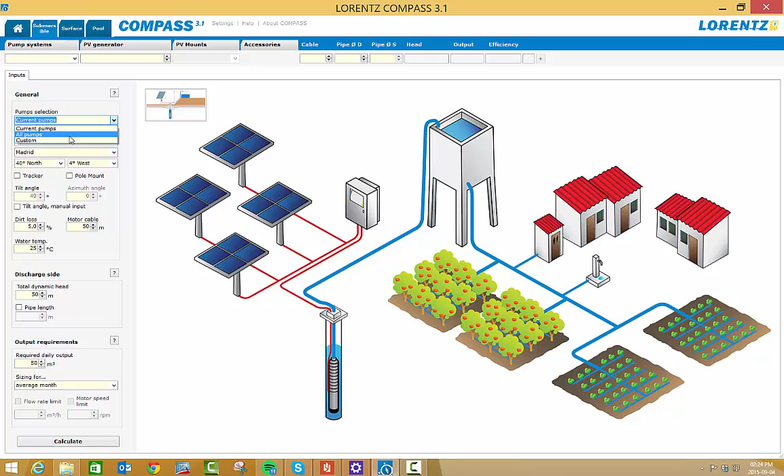Lorentz Compass. Submersible pumps, usually the more popular one to go for. Very basic software. You can use current pumps, all pumps, custom pumps. I use current pumps.

Click on location and start typing, then we'll reach it. Most of the regions in Southern Africa are listed, or if the customer gives you a location and you cannot find it, look for an alternative as close as possible via Google Maps, Google Earth, etc.

You're going to need basic parameters from the customer, like the depth of the hole, the volume of water that you want to displace, the depth of first water, if there's a drawdown. The drawdown is usually from the top of the borehole where your water level is once the pump starts pumping, and if it's not a very strong hole, the water level goes down. Now that is your drawdown level.

Now to the maximum drawdown level, you can pretty much sink the pump up to 5 meters below that. Most people prefer sinking the pump to 5 meters from the bottom of the hole, if that's allowed, if the water level is 5 meters above the bottom of the borehole. Suggested 5 meters from the bottom, not to suck up any mud or sand or residue.

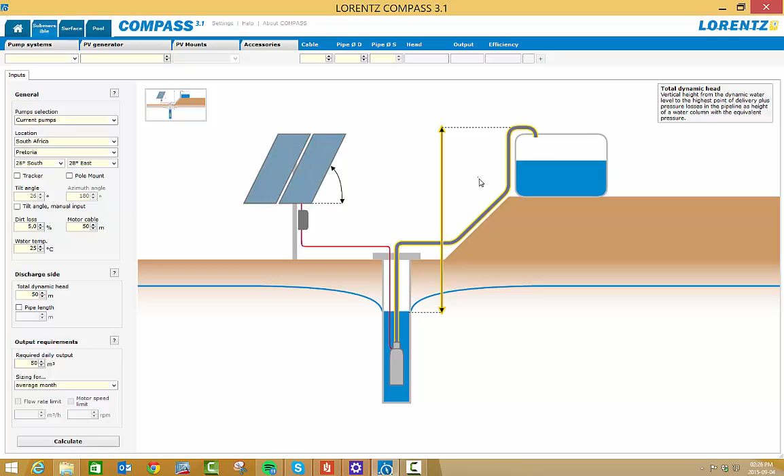Usually we start off with the total dynamic head. Total dynamic head will be from the mouth of the pump to where your water is going to be displaced. Now in this diagram it's a water pump. So let's say for instance the customer has a 45 meter head. I usually go 5 meters extra just for a slight bit of over engineering.

But his borehole is only 20 meters deep. The pump will be then situated at 15 meters, so you're going to allow for the 15 meters down the hole and approximately 5 meters outside the hole for your cable. You don't always spec your cable as the same depth or the same length as your dynamic head.

Pipe length, that's for in case you run long pipe distances and the tank is not situated next to the hole, then you can add a pipe length. Let's say for instance the tank is 120 meters away from the pump itself. That will be your 15 meters depth of the hole, the pipe running down there, and then obviously 105 meters across. Pipe type, you can select plastic or steel, all depending on what the customer already has in.

Now on the daily required output, certain customers will give you an hourly rate that they require, a certain amount of water per hour. Other customers will give you a daily rate required. Now for this selection, we're going to say the customer needs 2,000 liters per hour minimum. So the rule of thumb is, if it's 2,000 liters per hour times 10, you're going to say 20 cubes per day, and do your selection for the driest month as you want the minimum volume available in your driest month. Click on calculate.

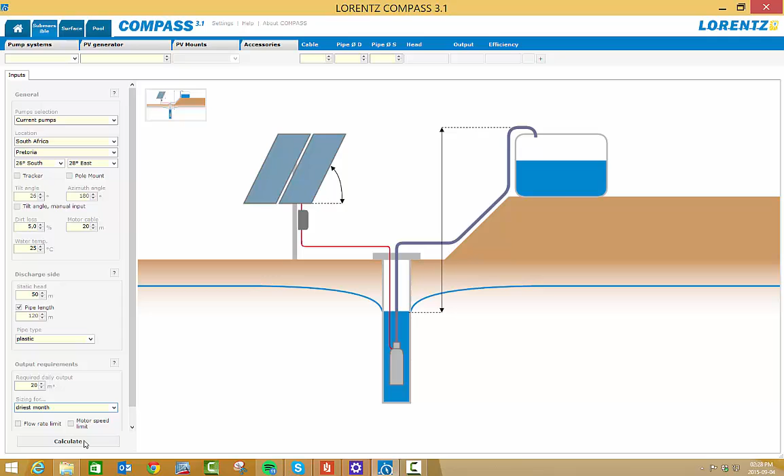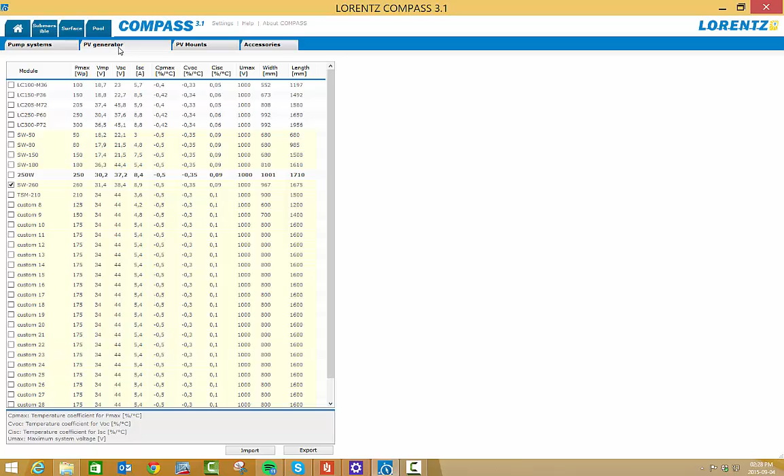Now it's going to give you a bunch of options. Not always necessary to go for the cheaper option. You can give the customer a larger pump for expansion at a later stage, which is always wise. If the hole can only allow a certain amount of water and the customer is convinced that he will never change it, then you can go for your cheapest solution. I prefer not using the smaller panels, as the selection is always a lot easier with the larger panels. Gives the best yield, gives the best performance.

Now, he said 2,000 liters per hour. This flow rate gives you an average of 1.9 cubes per hour, so you want to increase that. You can go and adjust the solar panels, the quantity. Okay, PS600, we are on the limit. Now, you can go to a larger pump. Right, there we go. That's a better solution right there. It's already 2.2 cubes, 2.3 cubes, so you can have it at an average of about 2,200 liters over 7 hours. I'm pretty sure the customer will be very happy with that.

In case the pump is giving too much volume, or 100 or 200 liters an hour too much, you can always open the control box and you've got a volume adjuster in the control box which pretty much controls the frequency of the motor. If you turn it down, it will give you less water per hour, less pressure, etc. So you can easily give the customer that scenario.

In the event that you might want to use a pump like this, and you see, okay, 4 square cable, you can adjust the cable lower to suit the customer's existing pump needs. If he's got a 2.5 square cable, he can use the 2.5 square cable. You can also adjust your pipe size.

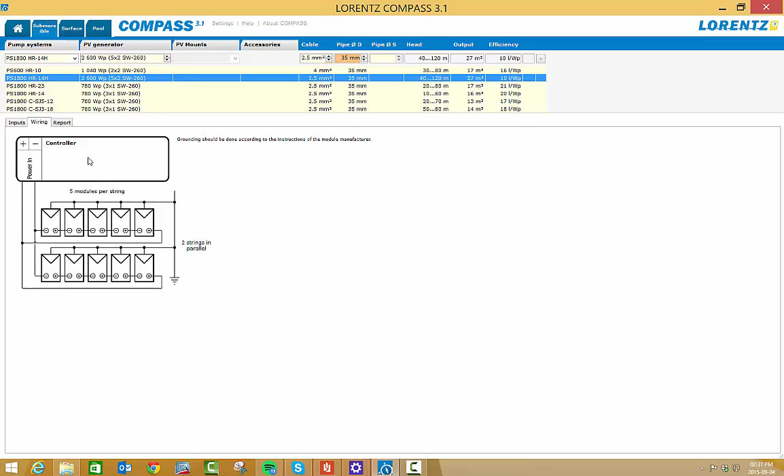Then you can go click on report. We'll give you all the basic needs for the setup. Motor cable 2.5 square, 20 meters of pipeline, 120 meter, 35 mm inner diameter, 1 probe set, surge protector, etc. And there we go. That's your basic pump selection.

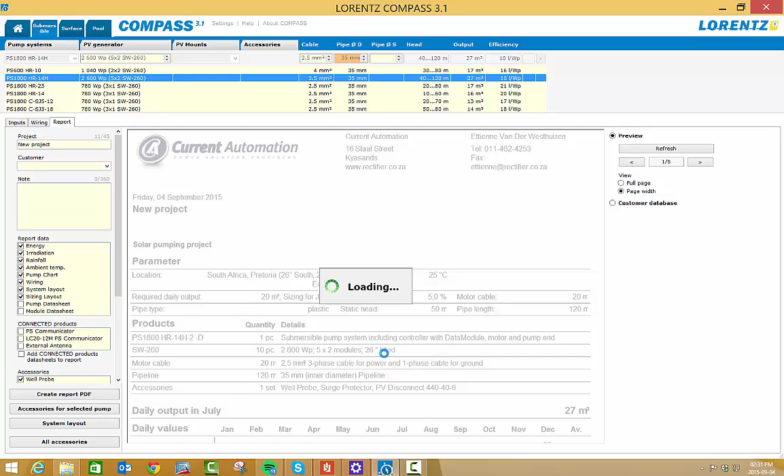It gives you all the curves that you can see. It gives a very wide explanation of the pump along with your wiring diagram and the basic layout of what the system can do. You can click on create report PDF and save it as the PDF and send it to the customer.

Myself, just for doing it quicker and more efficient, this whole page gives you all the data that you need. So you can click on your screen cut, do a screen snippet of that, save it as a JPEG and send that to the customer. More than this, they do not really need. If they need a report, you can print out a report, but it takes somewhat longer to generate the report rather than just taking a screenshot. Okay, and that concludes basic pump selection on submersible pumps.

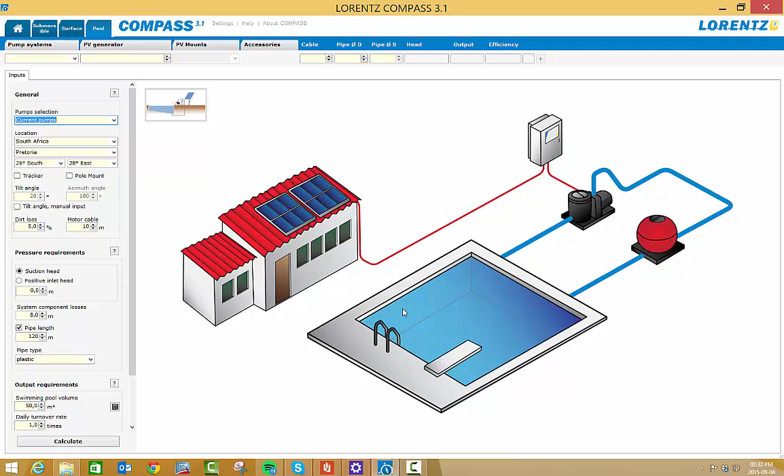Now, pool pumps. Same story, only thing is here we work with the total volume of the pool and the pool pump. Motor cable from your controller to your pump, usually not suggested that it's so far, not supposed to be more than 5 meters from my point of view.

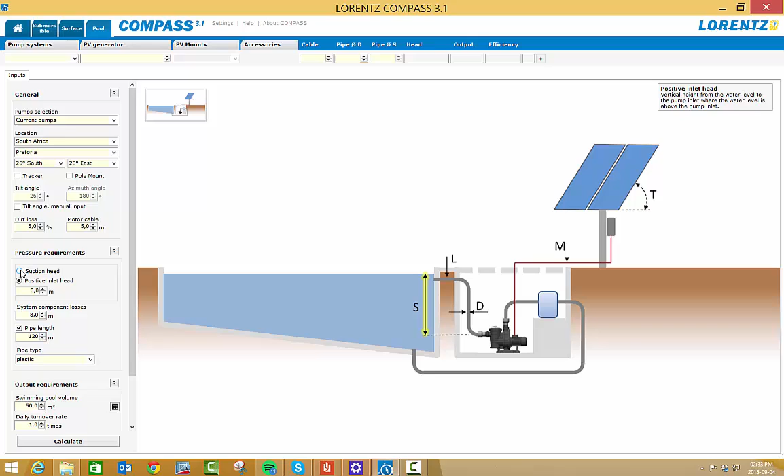Then, do you have a suction head or a positive inlet? Suction head is if your pool pump is higher than the pool. Positive inlet is if it's level or lower than the pool suction weir. So in this case we're going to use a suction head of, let's call it maybe 1 meter. System component losses. As a standard, we've got a 4 meter loss for a sand filter.

If for any reason your pipe runs higher, it's a long pipe run, long distance, and your pipe runs higher than the pump or needs to displace through a solar heating system, etc., you add the physical meters to that as well. Your whole pipe length, that is from the mouth of your pool into the weir, your suction line to the pump and your displacement line through the filter back to the pool. That's your total pipe length.

On a 50,000 litre, it'll never be 120 meters. You're looking in the region of about, let's call it 20, let's even make it 30 meters. Okay, pipe plastic, most pool installations are done with plastic pipes. Then your swimming pool volume. You can either take the customer's word for what his pool size is, or you can click on the calculator.

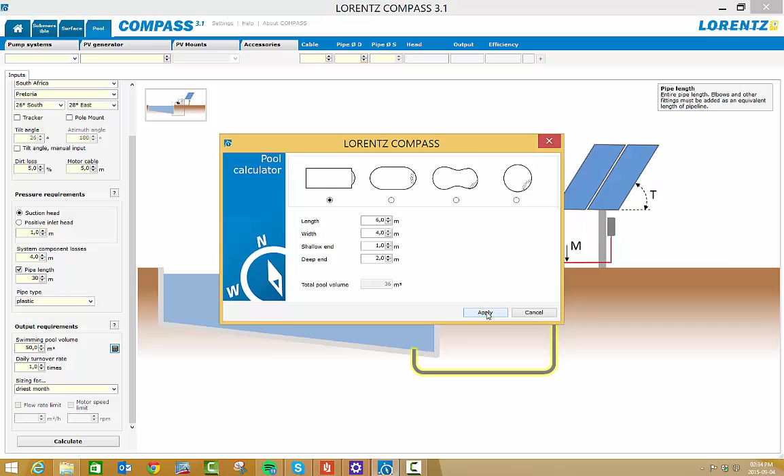Different shapes of pools. Normal square pool, let's say for instance the pool is 6 meters long by 4 meters wide. Your shallow end will be 1 meter and your deep end will be 2 meters. You're looking at a 36,000 litre pool. Apply. 36,000 litres comes in there.

As a standard, I suggest a daily turnover rate of 1.5 times. It just gives you a better curve. In the event that you've got an overcast day or not sufficient sunlight, your pump will still run at a decent rate and give a decent turnaround during that day.

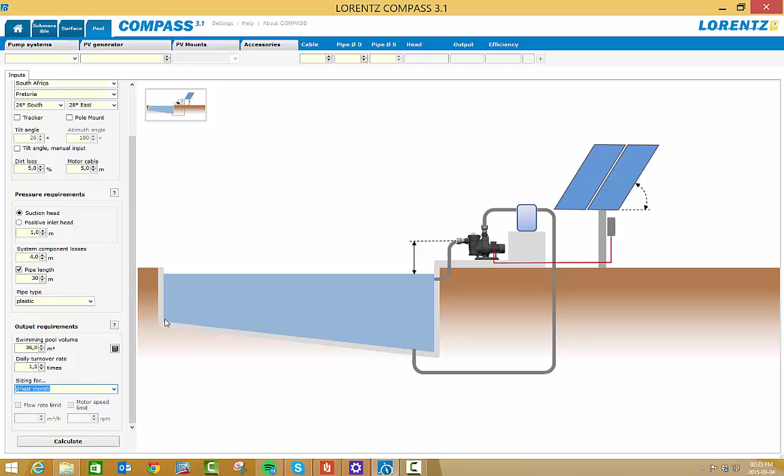Similar as the other selection, click on calculate. It will give you your curve. PS600, two 260 watt panels, 2.5 square cable. Pipe.

Pipe is too big, 80 millimeter. Standard pool pipe is 50 millimeters. That's your flow rate, that's your daily pool yield. Now if you look at that, we want 36,000. This is close to 3 times. So you're going to have sufficient cleaning on the pool. The pool's going to be a lot healthier than with a normal or standard pool pump.

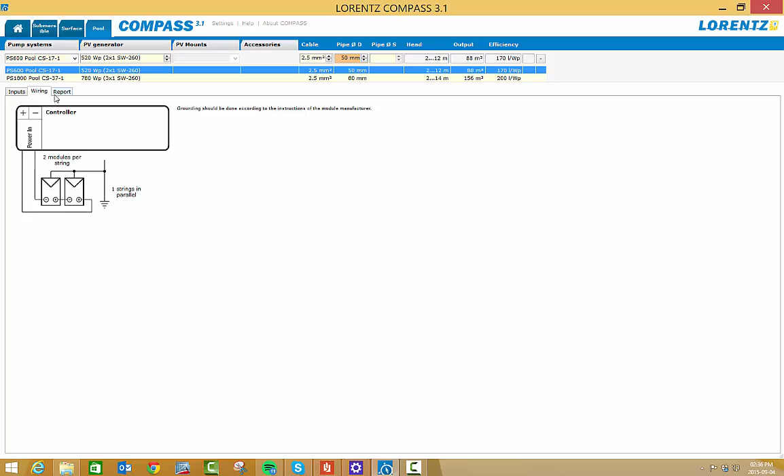If you look at the time running, it's 1, 2, 3, 4, 5, 6, 7, 8. It's 9 hours of run time. So if you go back and you calculate, this would be a good equivalent to a 0.75 kilowatt pump. Running a 0.75 kilowatt pump for that duration of time, it's going to work out rather expensive on your electrical bill. But once again, that's your selection. You can give it to the customer. That's 2 modules. You can either print out a report or do a screen clip.

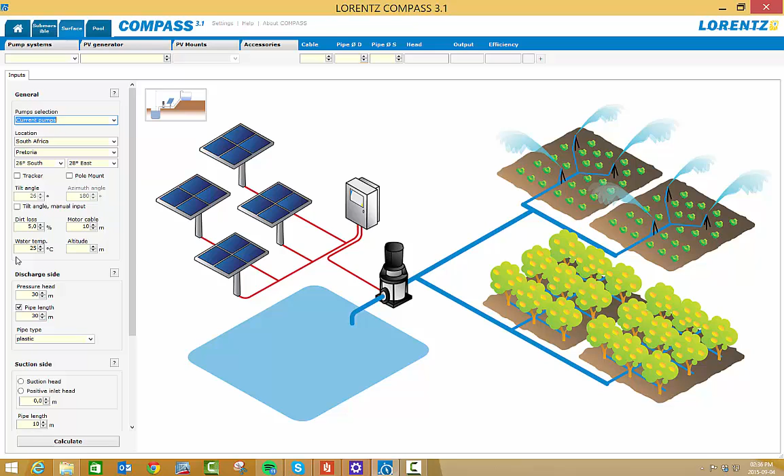Then lastly, surface pumps. That's a pump sucking out of a dam or receiving water out of a tank, displacing it towards either crops or just from a dam or a river towards another tank or dam, just transferring water. Same story, you can select your area where you want it, motor cable, usually 5-10 meters away, same as a pool pump.

Altitude, you can go onto Google, Wikipedia, look at the area, the physical location. The internet will most probably give you an altitude, which works out to about 1,560. That's above sea level. Then your discharge side. If you need to run uphill 30 meters in elevation, or you need 3 bar pressure, every 10 meters in height equals 1 bar. So if the customer says he wants 3 bar pressure, that's 30 meters.

So let's say for instance this gentleman has got a 20 meter incline and he requires 3 bar pressure. It's 20 meter incline plus 3 bar, that's another 30 meters, so it's 50 meter head. Your pipe length towards wherever you want to displace, let's say 400 meters. Let's make it interesting, 4 kilometers. Plastic pipe, and let's say a positive inlet. This is coming from a tank or a dam, which is 2 meters higher than the pump. Plastic pipe, pipe length, you can call it 10 meters, it's fine.

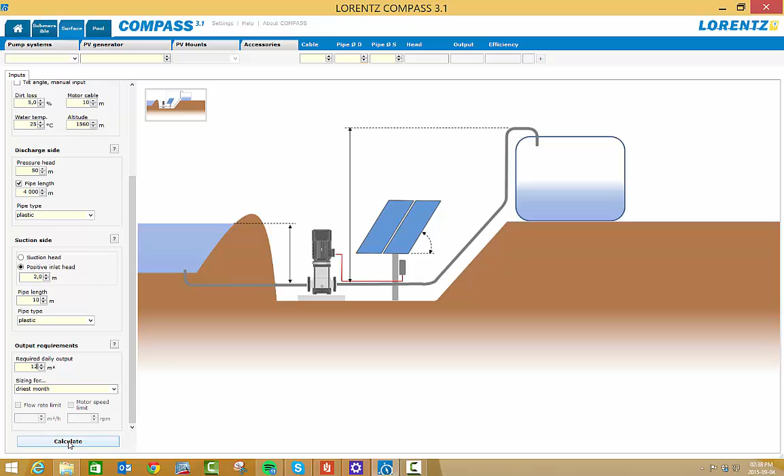And then the amount of water that you want to move. If it's for irrigation purposes, they will ask you for liters per hour, or if it's just water transfer, liters per day. Let's say for instance this is for water transfer and irrigation, and he needs a minimum of 1,200 liters per hour. So, rule of thumb, 1,200 times 10, it's 12 cubes, 12,000 liters per day. Calculate. Your curve does not accommodate what you want to do.

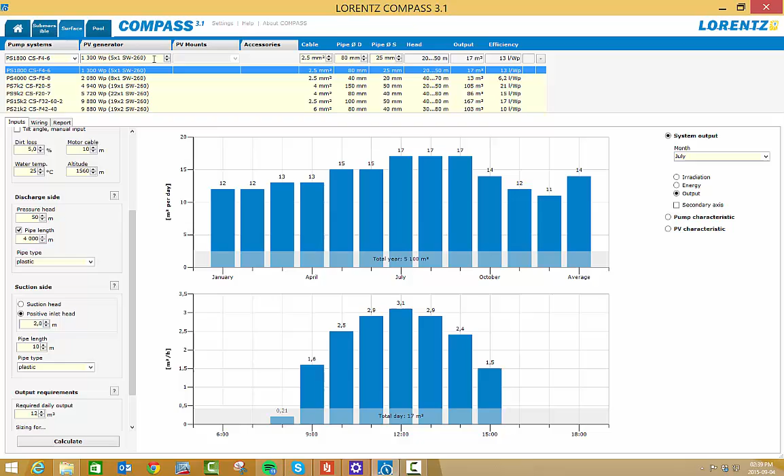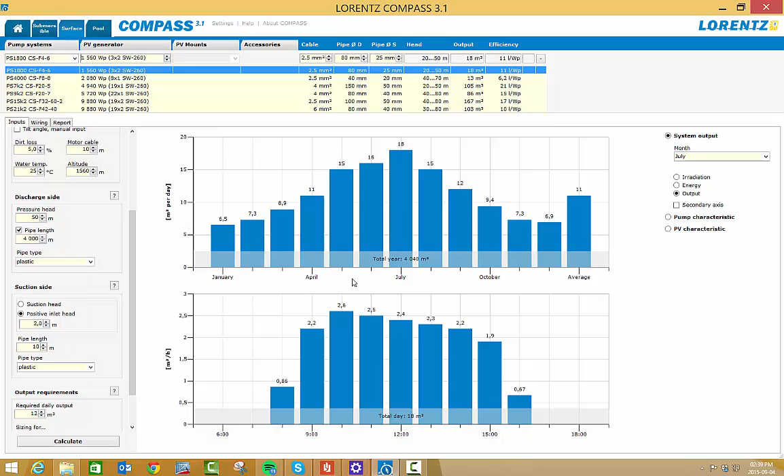1,200 liters, yes, you can choke it back, so it will give you more than 1,200 liters at 3 bar pressure for 7 hours, which is perfect, but it's not entirely what the customer needs. This is way more than he needs. So firstly you can downgrade on the panels, see if that will help you, if it gives you a more square curve. If not, oh wow, that looked nice. You can utilize that one, it gives you a nice flat curve. It's more than the customer needs, but he can choke it down and he'll get a more even spread of water.

Once again, not necessary to go for the cheapest, but if the cheapest gives you your solution, absolutely go for it. If he runs a smaller pipe system, say for instance a 40 or 50 mil inner diameter, that's bringing your flow rate down again, giving you a perfect flow for what the customer needs. So once again, panels are perfect, your cabling, everything is fine. So there's your selection. Do a screen snippet of it, send it to the customer, find out if it suits him, and then you can do a quotation for him.

The next video will actually show you how to do a quick quotation, just to give the customer a good cost estimation of what his pump system will cost and what he's in for. And if the customer is happy with that, you can arrange a site visit, work on a turnkey solution, or alternatively just supply components. The pumps are very easy to install. The customers can do it themselves, but you're going to have the odd customer asking you to come and do the installation for him. Thank you very much.